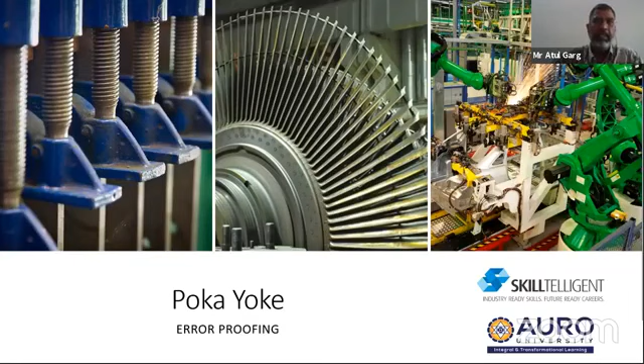So today we will discuss what is Poka-Yoke, look at some common examples. We will try to understand the principles of Poka-Yoke and the difference between error proofing, mistake proofing, and Poka-Yoke. We will also look at prevention versus detection and methods of Poka-Yoke, followed by commonly implemented Poka-Yoke. I'll discuss some of the Poka-Yokes which we have implemented through my team in various client locations, and then we will summarize and conclude this session.

So to begin with, Poka-Yoke is a Japanese term, as Kishore rightly said. It means mistake proofing. Poka-Yoke is any mechanism in lean manufacturing that helps an equipment operator avoid committing mistakes. Mistakes being Poka, and avoiding being - the earlier word used was yokeru. Now yokeru has been simplified to Yoke.

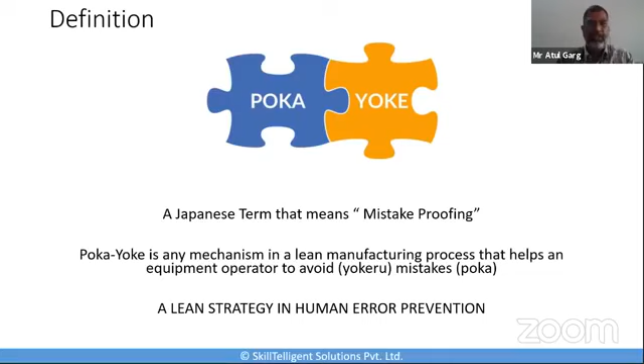So Poka-Yoke. The Poka-Yoke philosophy is based upon two fundamental observations about human behavior: number one, mistakes are inevitable, and two, errors can be eliminated. And that is why we say it is a lean strategy in human error prevention. So that's a quick overview about this.

Poka-Yoke was developed by a Japanese engineer called Shigeo Shingo, from Toyota Motors, who used it as a tool to achieve zero defects. By taking over repetitive work tasks or actions that depend on vigilance or memory, Poka-Yoke can free up the worker's time and mind, even mentally, so he can pursue more value-added activities.

Initially it was described as Baka-Yoke, meaning fool proofing or idiot proofing, but the name was later changed to a milder term called Poka-Yoke - Poka being the mistake, Baka being the fool or idiot. So the aim of Poka-Yoke is to design the process so that mistakes can be detected and corrected immediately, eliminating defects at the source.

Shingo distinguished between the concept of inevitable human mistakes and defects in production. Defects occur when mistakes are allowed to reach the customer. That is when defects occur.

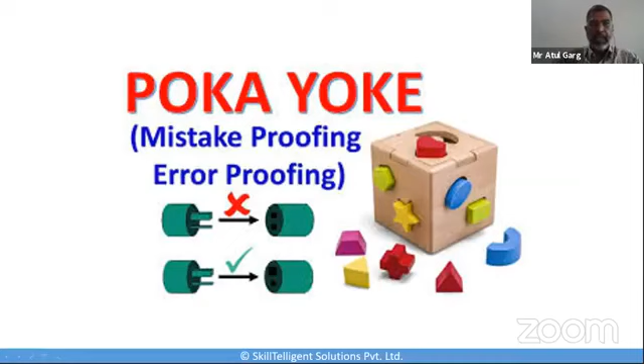Poka-yoke overcomes the inefficiencies of inspection through the use of automatic devices that seek to do three things: one, not accept a defect for the process; second, not create a defect; and third, not allow a defect to be passed to the next process. This is done in a number of different ways, but can be categorized as either control - taking physical action to prevent a defect - or warning - sounding an alarm or lighting up to tell us that a mistake has occurred or been made. So that is how Poka-yoke works, and these are the purposes of this.

There is always a clear relationship between the defects and the human errors. Even in the beginning itself, we said that mistakes will happen. You just cannot avoid it. In a repetitive work by humans, errors are bound to happen.

So I have listed some major known causes of defects in manufacturing and the corresponding human errors. For example, missing parts as a cause of defects can be due to human error, like intentional error or inadvertent errors. Defects caused by not following procedures could be because of human errors like intentional error, inadvertent error, or even forgetfulness.

Most of these errors can be addressed with proper training and mentoring of the teams. So some of these errors definitely can be avoided, but not everything can be avoided. You actually have to do mistake proofing so that even if the operator is committing a mistake, it is still caught and addressed.

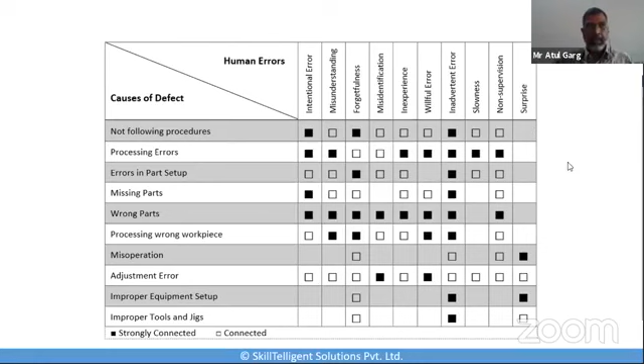So Poka-yoke will always focus on reducing or eliminating the human errors which can cause defects. Some of the benefits of Poka-yoke can be: one, decreased setup time with associated reduction in production time and improved productivity; second, elimination of setup errors; third, improved safety; fourth, it helps in lowering the cost of quality control.

Fifth, it helps in lowering the skill requirements. Even increased production flexibility can be achieved using Poka-yoke. And if you have a good Poka-yoke in place, the operator definitely has a better attitude because he is not supposed to run around for a lot of things simultaneously. This ultimately leads to increased customer satisfaction as well as customer loyalty. There are many more benefits Poka-yoke can lead to, but these are some of the major ones we can achieve.

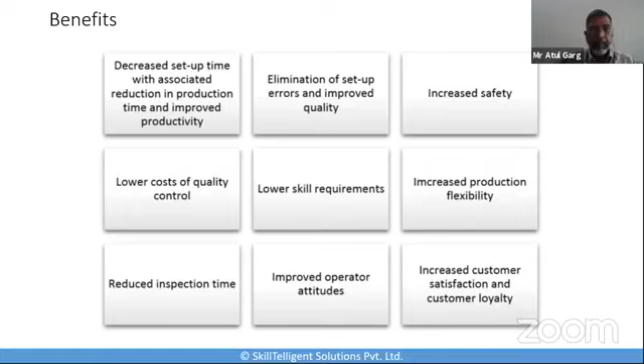Now, when it comes to Poka-yoke, it is not meant only for high-end, top-end manufacturing. Poka-yoke is actually present in our everyday lives. Some of these examples are very common and simple, but we sometimes don't even realize that we are doing some mistake proofing or error proofing in a default manner.

So error proofing in everyday life can range from safety features that could prevent us from getting injured, to maybe even a spell check in your Word document, which simply prevents us from making spelling errors that, if they go to the customer, may say, hey, this guy doesn't even know to write proper English. So spell checking actually helps us to prevent spelling errors too.

So I'm going to take some examples and then we will move on. The first example is mirror image writing. I'm sure you would have noticed that 'ambulance' is always written in reverse image, never in the normal way we write it. The logic is that when you're looking in the rear view mirror while driving, the image will appear opposite and will actually be readable to you.

But if it is written in the normal way, it will be visible to you in a negative, unreadable way. So this again is a way of mistake proofing, so that the ambulance is visible, apart from the flashing lights and everything, to the people looking into the rear mirror. So this is also an example of error proofing.

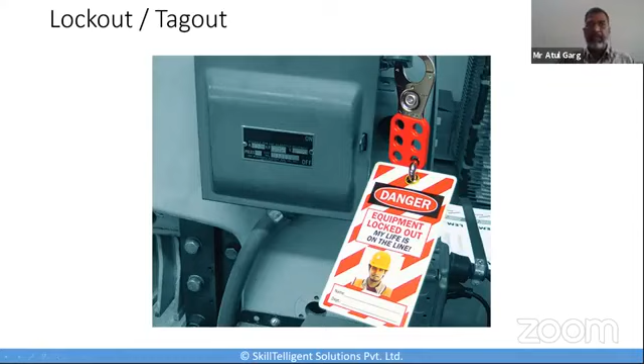Third example is a very common one that all of us would have seen. The SIM card has got a cut on one side, designed so that when you put the SIM card into a tray before inserting it into the mobile, it will not accept it any other way except when the cut part matches the slot given in the tray. This ensures that you never insert it the wrong way. A very simple, very common example, but again an example of poka-yoke.

The other example I'm taking is the toilet light in an aircraft. Once you go into the toilet and close the latch from inside, it triggers a switch and switches on the light saying the toilet is occupied. The moment you unlock it, the light goes off, saying the toilet is now available. So just by looking at the light, you know the toilet is occupied, without having to walk all the way to the toilet to find out.

So this was the idea to give you a perspective of what poka-yoke is, how we do error proofing, how we do mistake proofing. We all use it in daily life. But when you go into industry, you get into complex scenarios, obviously you have more things to look into, and you really have to dive into it.

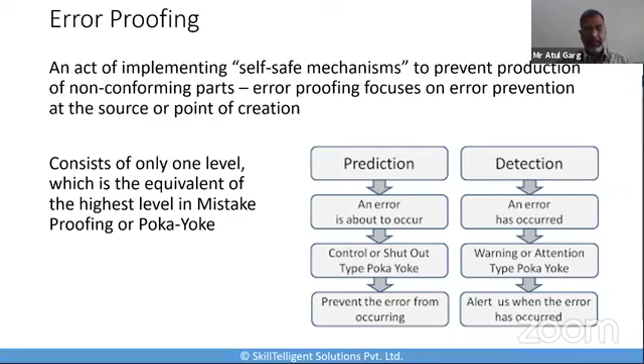Error proofing, unlike mistake proofing, consists of only one level, which is equivalent to the highest level in mistake proofing or Poka-Yoke. Now let's look at Poka-Yoke.

Poka-Yoke focuses on reducing or eliminating the human errors which cause the defects. In a way, it is very similar to mistake proofing, except that it is centered on the human factor. While in mistake proofing we also use devices and methods to prevent the error, in this case it is centered on the human factor.

The heart of Poka-Yoke is more of a concept than a procedure. So it's not a procedure or a process, but a concept, and its implementation in different ways is what helps you prevent errors. Implementation of Poka-Yoke would be governed by what people think they can do to prevent errors in their workplace, and not by step-by-step instructions on how they should do their job.

That's why we say that some errors can be eliminated by training, but training cannot always eliminate everything. So you have to figure out solutions to remove the errors or not let the errors actually take place. Again, as we had talked about, the Poka-Yoke philosophy is based upon two fundamental observations about human behavior.

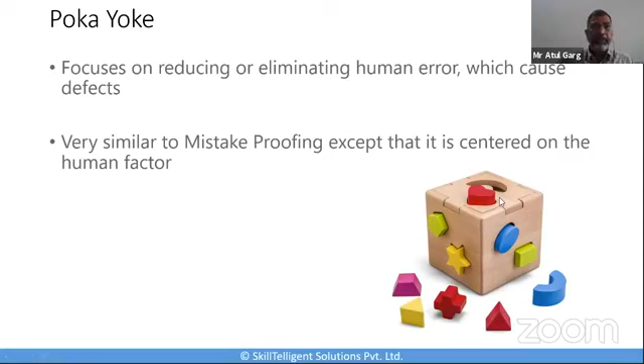One principle is that mistakes are inevitable, and the second is a belief that errors can always be eliminated. Using these two principles, we go about error proofing, mistake proofing, and Poka-Yoke. Now, what are the three levels of Poka-Yoke? The three levels of Poka-Yoke and mistake proofing are level 3: cannot produce, level 2: cannot process, and level 1: cannot accept or pass.

For error proofing, there is only one level, which is the highest level of mistake proofing. That is level 3, cannot produce. Let's examine that a little more. Level 3, cannot produce, is the highest level of mistake proofing, and it encompasses all kinds of controls which you implement to prevent defects from occurring. Therefore, non-compliant parts cannot be produced.

For example, if I take a very simple thing, you have a USB. You cannot put it into a particular position in the wrong way, it goes only in a particular position. It cannot go in any direction, it's a unidirectional way only, so it can be fixed only in one way. With assembly fixtures, sometimes we prevent it in such a way that the die cannot be inserted in a wrong way, it goes only in the right way. These are the ways in which we create scenarios by which mistakes cannot happen. So all the controls you put in which ensure that you cannot create an error is level 3. That's the topmost level, and that's also equivalent to error proofing.

The second one is level 2, cannot process, sometimes referred to as a warning level, as it provides a notification to the operator that a defect has occurred. So I'm trying to process something, but unfortunately I cannot process it. Some kind of warning may come up. The operator may look at that warning, maybe a flash, maybe a light, maybe a sound, and accordingly say, hey, something has gone wrong, let me look back into it.

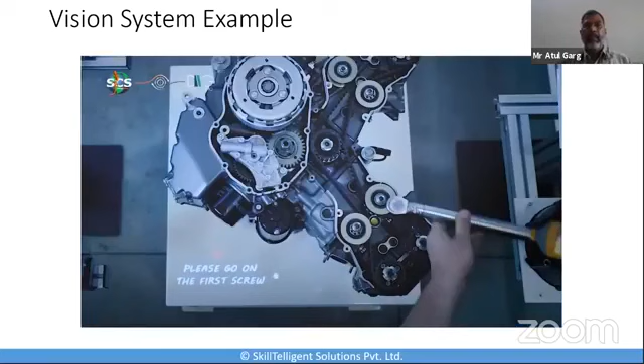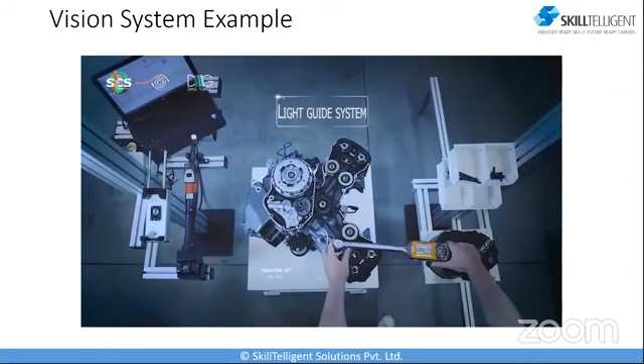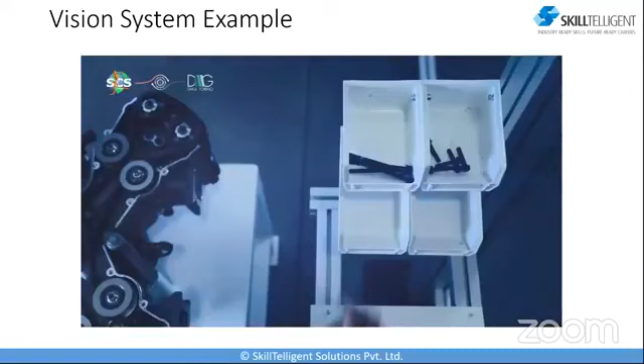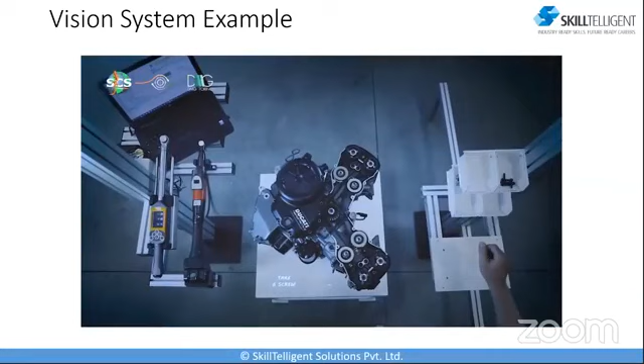As you can see, as he's putting up the torque wrench, the lights are telling him whether the pressure is proper. When he has put it in the right place, the lights are flashing, showing in which direction it has to be put in. It has been put in rightly, so it shows a green light. Then it highlights where the right kind of nuts have to be put. So it's complete error proofing and mistake proofing. This augmented reality based tool ensures that you are not making any kind of mistake while assembling the engine.

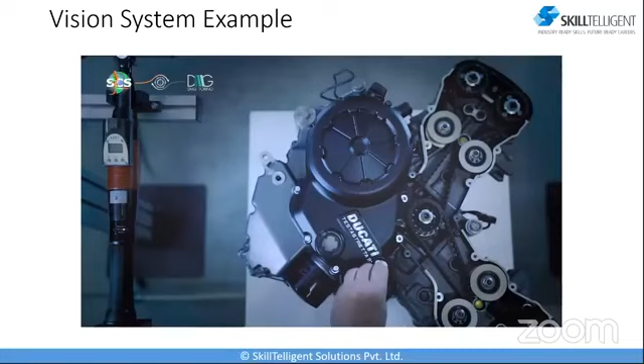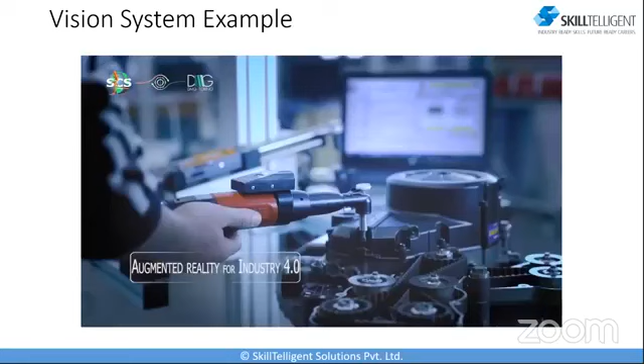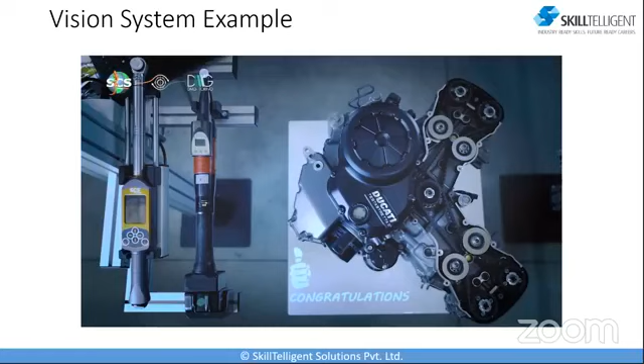Every time he is tightening the screw, it gives a light telling him whether the screw has been tightened up properly or not. As he puts the equipment back in the right place, it also confirms it has been put back correctly. Now it's completed and it's saying congratulations. Of course this is a bit of a demo, but at the same time it's a classical example of how a vision system based Poka-Yoke would take place.

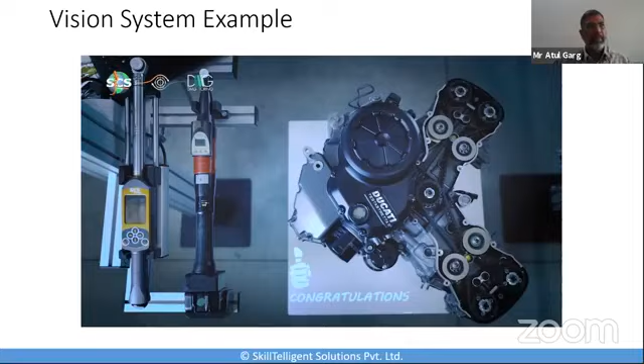So let's talk about the Poka-Yoke approaches and methods. Usually Poka-Yoke has two approaches: one is a control approach, and the second is a warning approach. The control approach senses a problem and stops the line or process immediately so that corrective action can take place immediately. This avoids serial defect generation, meaning a repetitive defect can be avoided because you already get a warning or problem identification.

The second part is the warning approach, which signals the occurrence of a deviation or trend of deviation through an escalating series of buzzers, lights, or other warning devices. However, unlike the control method, the warning method does not shut down the process on every occurrence; it will just give you a warning, whereas the control process will actually stop the process. So based on the severity of the issue, you decide: if this kind of error happens, I need to shut down so the error can be corrected. If it's not very severe, I can continue, but a warning must come so I can take corrective action as necessary or immediately.

There are three Poka-Yoke methods: the contact method, the constant number or fixed value method, and the sequence or motion step method. We'll look into all three quickly and try to understand each of these methods.

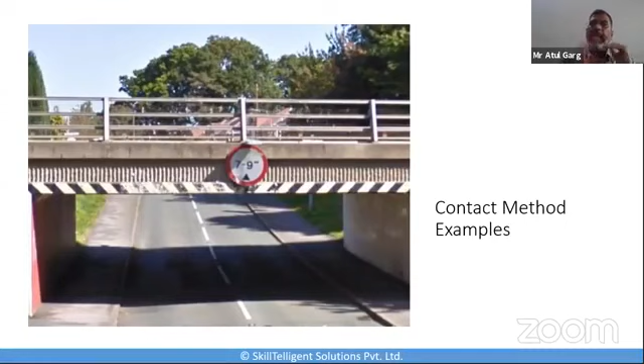Another example of the contact method: whenever you have an under-bridge pass, there may be a bar on top painted white and red, white and black, yellow and black, or red and black, essentially saying this is the maximum height. If your vehicle is taller than this, please do not attempt to cross, because it can get jammed. This is to prevent an error, and it is again a contact method, showing the maximum height allowed to go through that particular underbridge.

The second method is the constant number or the fixed value method. This method would alert the operator if a certain number of movements are not made. Suppose an operation needs to be performed multiple times and a Poka-Yoke has been installed, then it will make sure that the operation is performed for that many times as specified.

Suppose I'm supposed to put in 6 screws into a casing. If I'm not putting in all the 6 screws, then it will alert me that I have not completed my sequence of the operation as specified. So it will count the number of repeated operations, that is the 6 times of screw insertion and tightening. That's why we could call it the fixed value method also.

We could even put up counters to calculate and count the number of fixed parts to be used at each step. Take an example: if you've ever used IKEA furniture, it comes with very clear instructions on how to assemble it, and a fixed number of parts for assembling it. At the end of the entire assembly, if you're left over with even one screw, then definitely you have missed it somewhere and have to look back. That's a very simple Poka-Yoke. Every screw has to be used because every screw has been strategically designed to be part of controlling or managing the furniture. So that's the fixed value method.

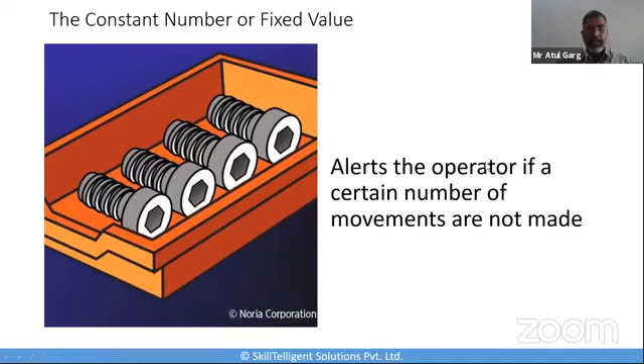Now in manufacturing, we could also provide a bin, like in the example given here, and in the bin there could be a fixed number of parts supplied to you. So when you are doing the assembly, you have to use all the components provided there. If some component is left behind, that means you have not completed your work. And if it is sensor based, it will alert you automatically and maybe even put up warning lights. So that's the constant number or fixed value method.

Same example as before: you can be given a bin with a set of different parts that go toward a common assembly. And if a part is left behind, that means you have not completed your operation properly.

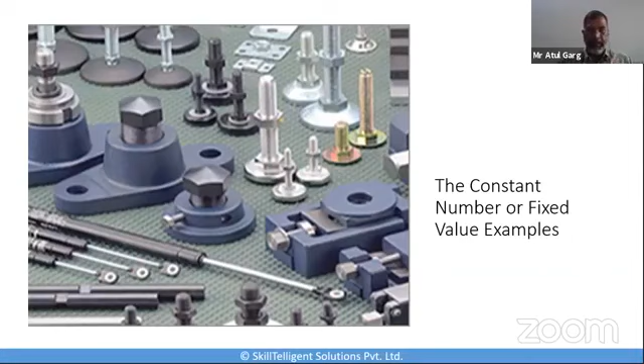The third one is the sequence or the motion step. This method aims to ensure that the prescribed steps of the process have been followed before starting the next stage. Motion step Poka-Yoke would check if an operation has performed all the required functions or not. If the operator has missed out any step, or performed a step that is not required, then some kind of warning would come up, ensuring operators do not miss any step in completing the complete sequence of the assembly.

Color coding and tagging are other examples of sequencing Poka-Yoke. For example, all parts coming with the red color have to go into a particular part, and the green color has to go into a particular location. If I'm left behind with something on the green or red, I know I've not completed all my sequences or motions correctly. That's another way this is carried out.

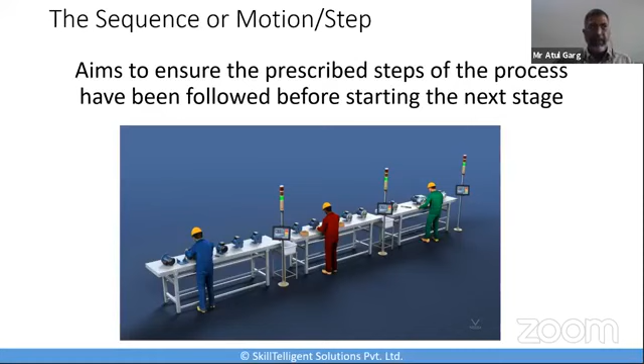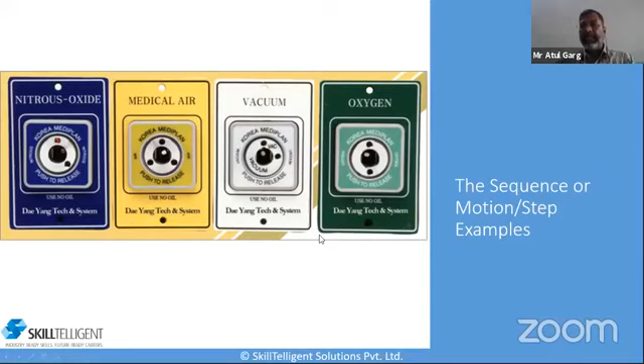A good example would be healthcare: if you've gone into an ICU or a hospital room with an oxygen supply or medical air supplied there, you'll find different outlets with different color markings, which are the standard colors given to that particular type of material or gas. The receptacles that go into them will also be of the same color, so that you do not mix and match and, by mistake, give something other than oxygen to the patient. So these are again examples of Poka-Yoke, the sequence or motion based upon color coding.

Some of the commonly implemented Poka-yokes in manufacturing can be when you have someone consider changes to die design for efficiency. For example, I get a die and I could put it into the machine in a way that may not be correct. But if I ensure that my fixtures and jigs are placed such that my die doesn't fit in any direction except the one required, then die design efficiency starts coming in. My change of die is fast and quick, and I'm not committing any mistake while putting it up.

I could similarly design fixtures for consistency, similar to point number one with the die, where you have the right shape so only one part could go in one way. Fixtures can also be modified to make it impossible to place the part incorrectly.

Third, we can install sensors to prevent the processing of a defective product. We can put up limit switches, proximity sensors, or infrared sensors. These sensors can also ensure that we are not putting something in the wrong manner or wrong direction.

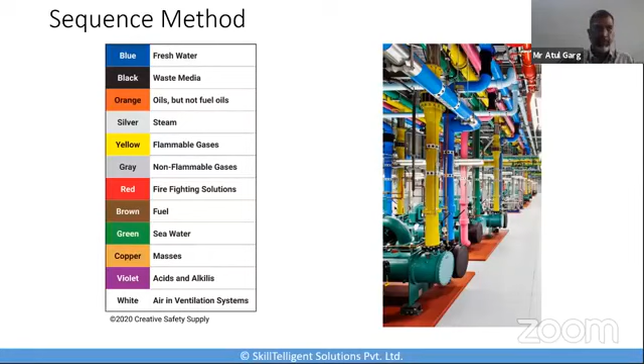Similarly, you can also do color coding on the floor, and that can help you identify what material has to be kept where. This is also part of the 5S, but it's also a Poka-yoke. There are standard colors. Red is used for scrap items. If an area is marked with blue, it means only raw material is to be kept there. Green marking means it's finished goods. Yellow marking indicates a pathway you can pass through, and that's also sometimes used to highlight the boundaries of work areas. These markings help you identify what should go where and how. That's another kind of Poka-yoke.

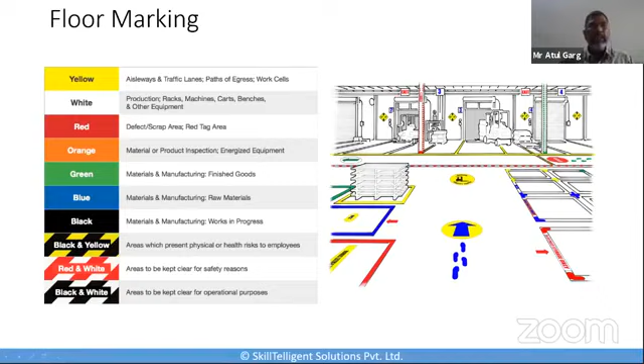This increased the downtime of the machine while changing rolls. With the roll placed in the right sequence with color coding, the operator himself can do it, and in the free time while the machine is running, he can ask the helper to bring similar rolls from the main stockyard.

Similarly, as another example of Poka-yoke, we took 5 containers and placed them in a specific matrix to maximize the number of rolls that could be kept within them, consolidating 5 such crates so that when placed on the shop floor, it would occupy minimum space yet maximize the number of rolls kept there. This was another Poka-yoke we tried to balance out.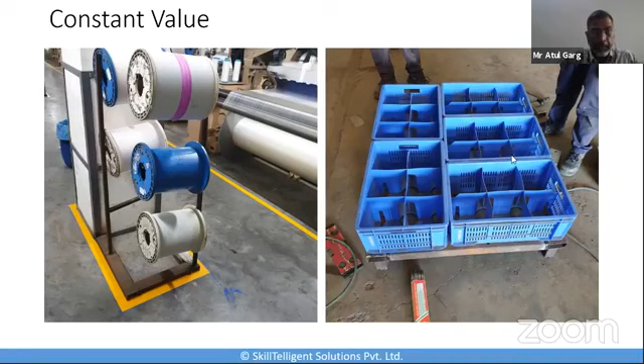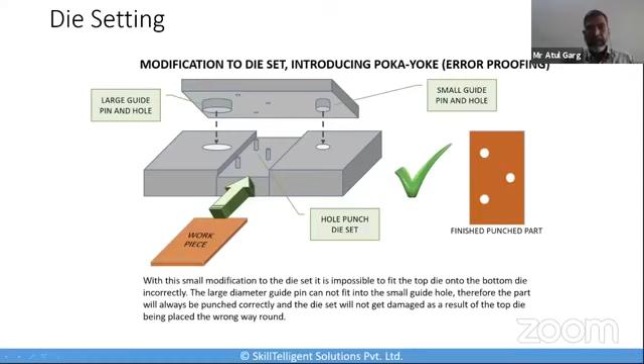So FIFO is ensured by this sliding mechanism. The filler comes from the back side, so it won't obstruct the people withdrawing material while operating. This gives the operator space to operate easily while the filler keeps filling without disturbing the operator, and the Poka-yoke ensures FIFO.

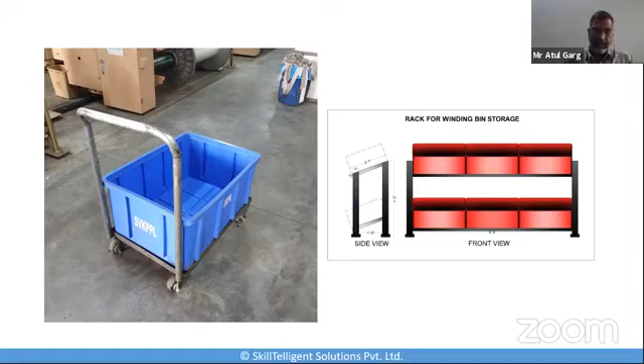The supply to a particular machine now was ensuring that a fixed number of bobbins were given to that machine operator, and he doesn't have to wait for the missing bobbin. So this is again a very simple example of Poka-yoke.

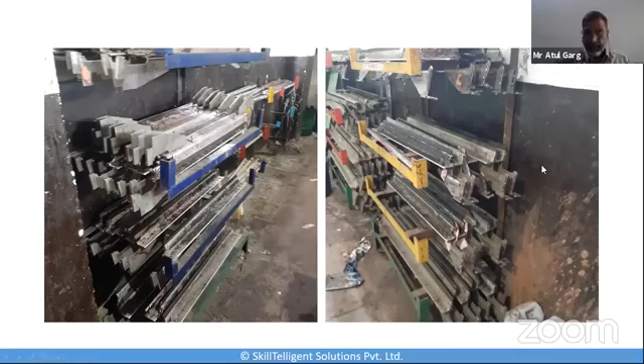So this is what Poka-yoke overall is. To sum up, Poka-yoke techniques can always be used wherever a mistake can occur, and something can be done to avoid that particular mistake. This fundamentally means anywhere and everywhere you can apply Poka-yoke. It can be successfully applied to any type of process and manufacturing, or even in the service industry, and it can prevent all kinds of errors.

The 6 major types of errors it can handle: Number 1, processing error, where a process operation is missed out or not performed as per the standard operating procedure. Second is the setup error, using the wrong tooling or setting machine adjustments incorrectly. Missing parts, where not all parts are included in the assembly, welding, or other processes. Improper parts or items, that is wrong parts being used in the process. Operational errors, carrying out an operation incorrectly or having the incorrect version of the specification. And the last one is measurement error, that is error in machine adjustments, test measurements, or dimension of a part coming in from a supplier, and so on.

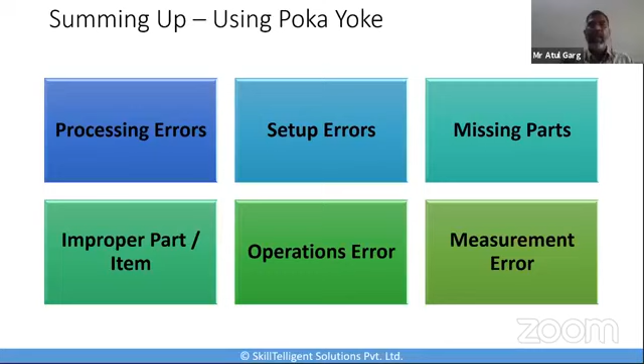So these are the top 6 kinds of errors. It definitely can help you. But other than this, it can always help you with any type of situation where errors can be prevented.

Shingo, the engineer from Toyota Motors, distinguished between the concepts of inevitable human mistakes and defects in production. Defects occur when mistakes are allowed to reach the customer. Poka-yoke is a lean strategy for human error prevention. There are 2 approaches to Poka-yoke: control and warning. The 3 methods of Poka-yoke are contact, constant number or fixed value, and sequence or motion and steps. And then there are 6 principles of Poka-yoke which we talked about: elimination, prevention, replacement, facilitation, detection, and mitigation.

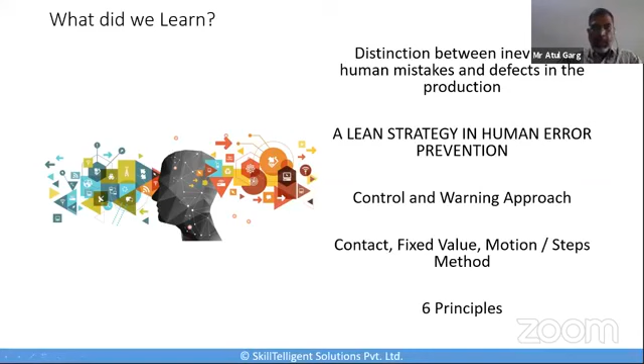Mistakes are unavoidable in a process, but what we can do is reduce the chance of making mistakes. If there are fewer opportunities to make a mistake, there will always be fewer mistakes. Poka-yoke triggers a modified or new process flow so that there are fewer chances of making a mistake. I hope this session has given you some insights into Poka-yoke.